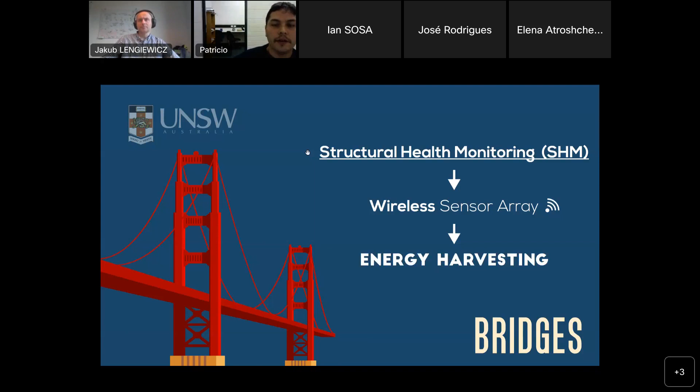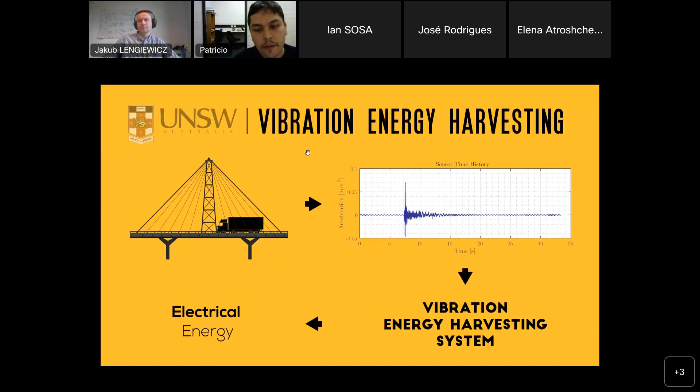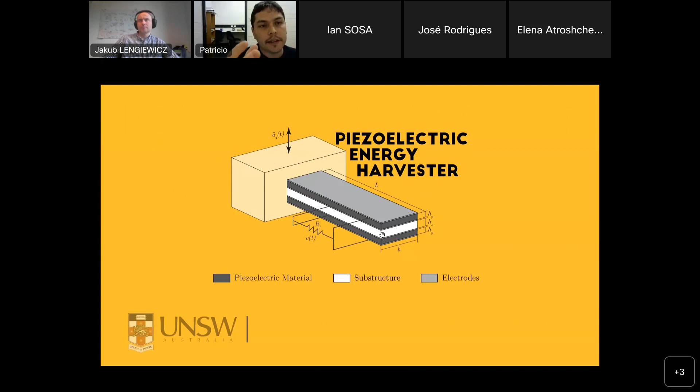In particular, vibrational energy harvesting has a big potential in this context because it can transform the traffic-induced vibrations into electrical power. There are different systems, but one of the most popular is the piezoelectric energy harvester, due to its higher efficiency per unit of area. This is its typical configuration, which consists of one or two piezoelectric layers joined to a substructure. The device is installed on the vibration source. So in this case, the idea is to install the device under the deck of the bridge. This is convenient for the installation process and also provides some protection from the weather conditions.

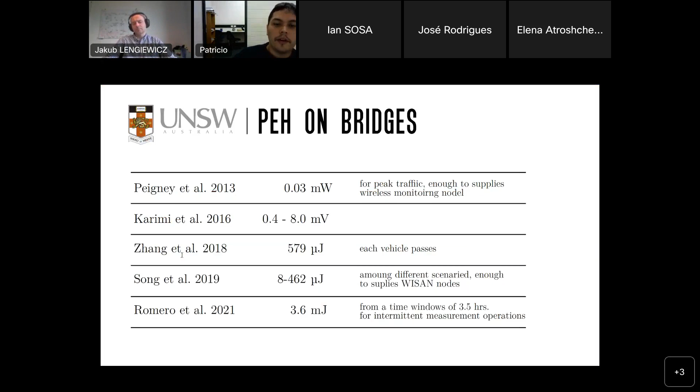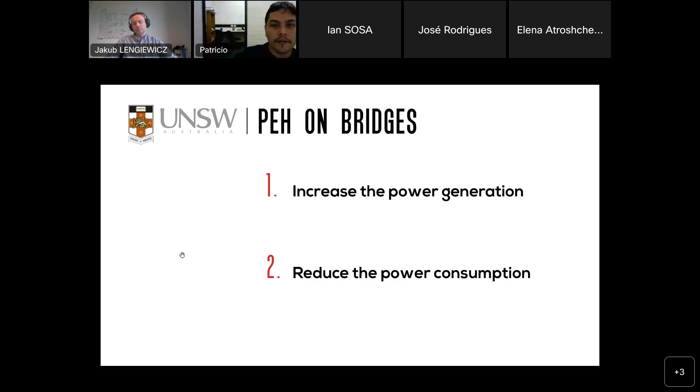There are some studies that have addressed the use of this technology on bridges. In general, the conclusion is the same: it is possible to use this device for continuous or in some cases intermittent measurement operations. However, its use has not become so popular compared with other technologies due to the order of power that they produce. We can address this problem from two points of view. We can increase the power generation of this device, or we can reduce the power consumption. Putting our focus on the second alternative, we propose to use this device as a sensor and energy harvester at the same time. This offers a new design space because they have the opportunity to be more efficient than traditional sensors, because they don't require a power supply for their operation.

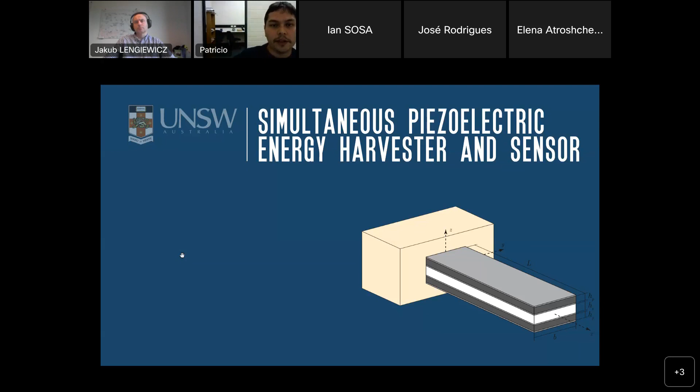In the literature, there is some research that shows it's possible to use this device as a sensor in order to determine the accelerations from some vibration source or to identify scour on bridges. However, in this study, we are interested in a different task. We are interested in traffic characterization on the bridge. Traffic characterization is an essential task in transportation systems because it provides reliable data for management and decision making in different tasks such as traffic monitoring or pavement evaluation.

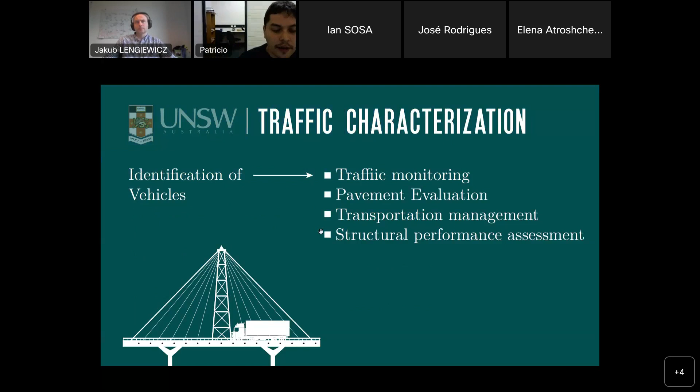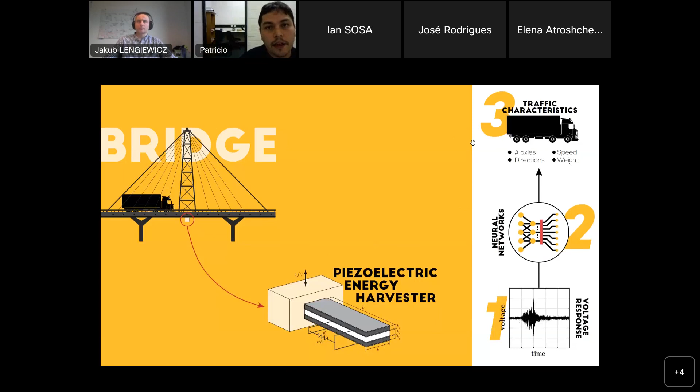There are many sensor alternatives to perform this task. However, we propose to use the voltage generated by these piezoelectric devices in order to identify the characteristics of the traffic using some deep learning techniques, okay? Deep learning has been used in this context with signals from strain and acceleration sensors in order to infer some of these characteristics. So we think that it's possible to extend some of these frameworks to our specific case.

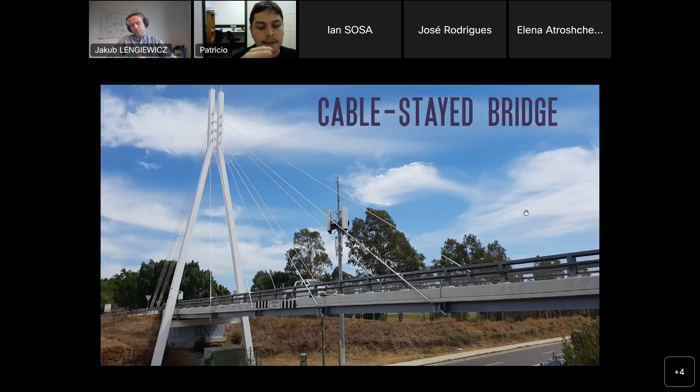Okay, in our work, we are going to focus on this particular cable-stayed bridge, which is located in the state of New South Wales in Australia. The bridge has one traffic lane and one pedestrian lane. Under the bridge, there is a set of accelerometers and strain sensors. In particular, we are going to use one device that is installed near the center of the bridge. We are also going to use two pairs of strain sensors in order to determine the speed of the vehicles that pass over the bridge.

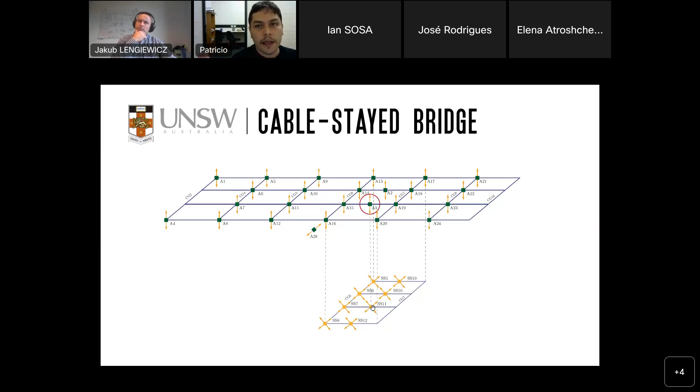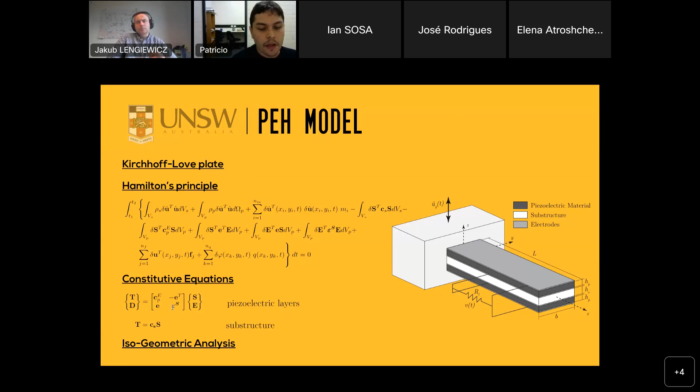On the other hand, we have one numerical model in order to estimate the voltage generated by any geometry of piezoelectric energy harvesters. This model is based on the Hamilton principle. We use these particular constitutive equations. And also we assume that the device is a Kirchhoff plate, and we use isogeometric analysis in order to solve this problem. Okay, so this is the main idea of the first part of the framework.

The idea is to use the acceleration signal from one of the sensors installed on the bridge. Later, using our numerical method, estimate the voltage generated by one piezoelectric energy harvester. Next, using one time-frequency analysis method, obtain an image like this in order to use as an input in our neural network. The method that we are using here is the continuous wavelet transform.

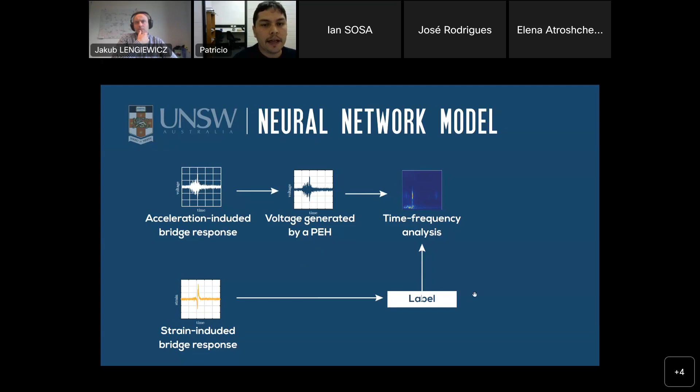On the other hand, we are going to use pairs of strain sensors in order to calculate the speed of the car that passed over the bridge, and use this information as the labels of our image. So we build a database. We divide this database and we train and test our model in order to obtain some accuracy of the speed of the car that is passing over the bridge.

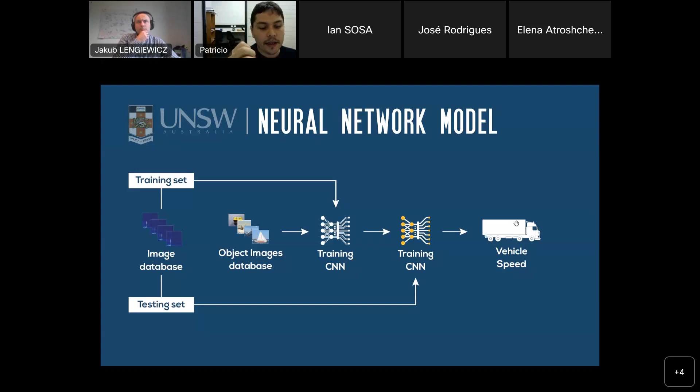Okay, so related to the selection of the convolutional neural network, it's important to note that the architecture is something that varies depending on the specific requirements of our task. So it's a good idea to evaluate different architectures before designing the final model. So in our case, we evaluate several popular architectures of neural network, such as GoogleNet, VGG, ResNet, and a couple more. And we conclude that the best one in our context was AlexNet.

So AlexNet is one of the most effective convolutional neural networks, and this is its architecture. The architecture has 8 layers. The first five are convolutional layers, and the 3 last are fully connected layers.

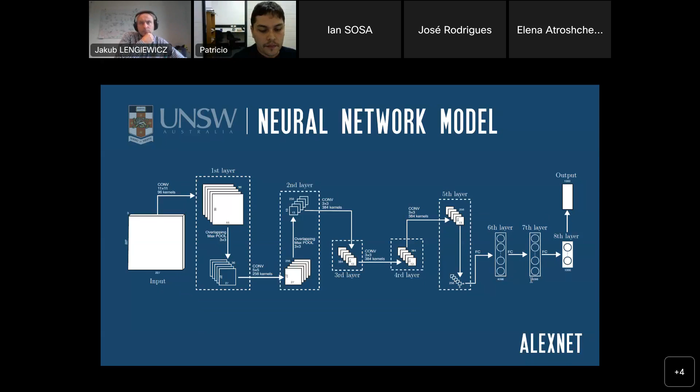In addition, in the training process, we use transfer learning because this makes this process more efficient. Here, the idea is to train the neural network using natural object images. Next, we replicate the first layers, the convolutional layers, which are responsible for extracting the information from the image. And then we just retrain the last layer using a small dataset of our digital images, or the CWT images.

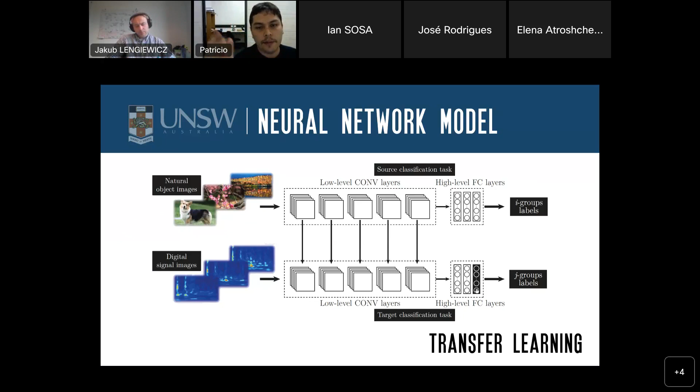Okay, so I'm going to present our case study. Here we consider more than 1,000 events. In addition, we consider 3 labels related to the speed of the car that passed over the bridge, and we train the model several times in order to obtain an average accuracy of our model. The accuracy that we obtain from one particular geometry is around 90%. But one question that arises here is, what is the impact of the geometry of the piezoelectric energy harvester on the sensing accuracy of our network?

So in order to address this issue, we consider 6 devices which only differ in the length of the devices, that is to say, in this distance. The rest of the geometrical properties are the same. The mechanical properties are also the same. And the lengths that we're considering are 5, 10, 15, 20, 25, and 30 centimeters.

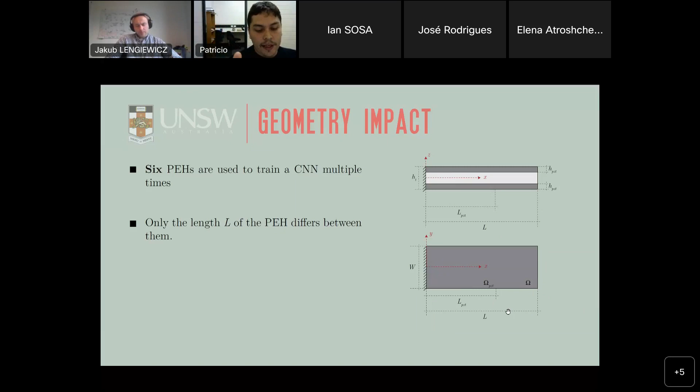So to interpret this result, it's necessary to consider that the convolutional neural network extracts information from the time-frequency analysis image. So here I present the 6 images from the 6 devices that we are studying for one particular event, that is to say, when a specific car passed over the bridge. The pink dotted line represents the resonant frequency of our device. So if we pay attention, we can see that the higher contrast in the wavelet coefficients, or in the image color of the figure, is around the resonance frequency of our device.

So that means that the information provided by each device differs between them, and some of them are better than others in terms of the predictions that we can make from them. And this leads to different sensing performance between them. Okay, so a new question that arises from here is how the sensing performance and the energy harvesting are related.

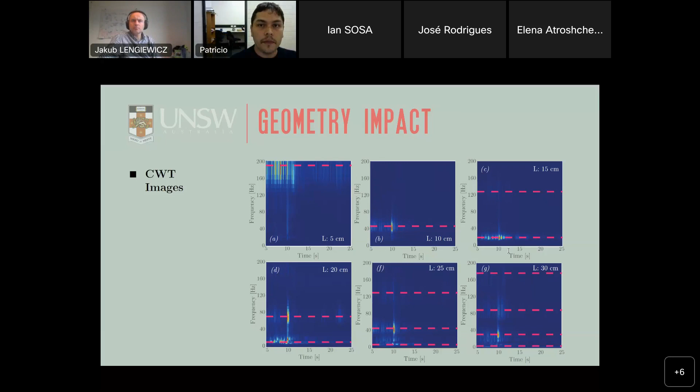So, in order to address this problem, sorry, I made a mistake in this slide, but in order to address this problem, we are going to use 5 different continuous time windows of accelerations. We are going to estimate the average energy that we can harvest from the bridge from each device, and we are going to compare the results.

So in the Y-axis, we have the accuracy of the network, and in the x-axis, we have the harvested energy from each device. So from here we can see that the optimal device in terms of sensing is the device that has a length equal to 25 centimeters. But on the other hand, the optimal device in terms of energy is the device that has a length equal to 15 centimeters. That means that there is a trade-off between the sensing accuracy and the energy harvesting of our device. So if we want to increase one of the objectives, it will be necessary to decrease the other one.

So based on this result, it's possible to state that the design of a bifunctional piezoelectric device is not a trivial task, because no single configuration simultaneously maximizes both. So in this regard, a multi-objective optimization framework is proposed to effectively tackle the selection of the geometry to address this trade-off between energy harvesting and sensing. So here we have the mathematical formulation of our problem. The idea is to maximize both at the same time, taking into consideration different geometries. In particular, we are going to use genetic algorithms to solve this problem due to their good Pareto front convergence.

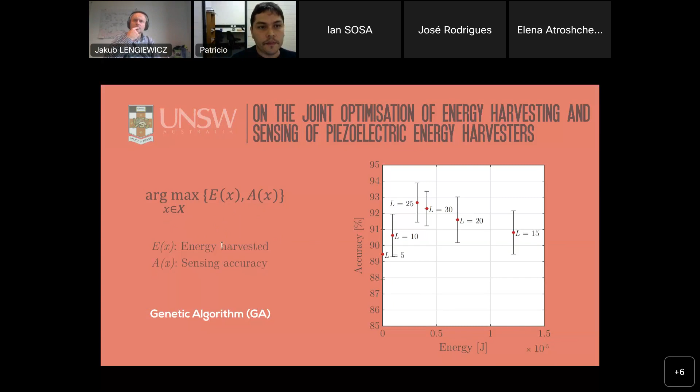One of the main challenges of this optimization problem is the long computational time to estimate the sensing accuracy and also the energy harvesting performance from one single device. So one attractive option to address this problem is surrogate modeling techniques. The surrogate model consists of an approximation of the relationship between the input and the output of a system using only a limited number of samples from a high fidelity model. In particular, we are going to use a Kriging model due to its ability to indicate the confidence level of the prediction of a new sample, and also due to its good performance with a reduced number of sample points.

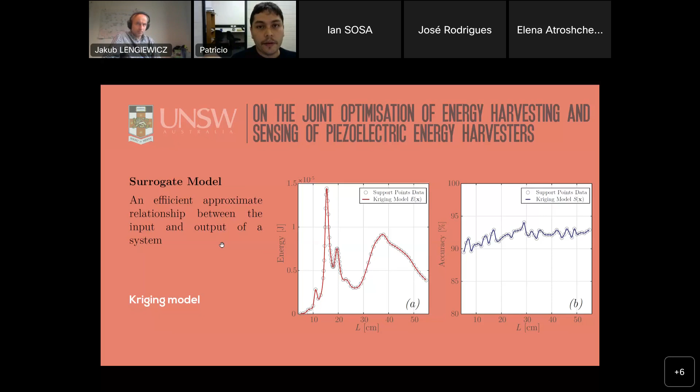Okay, so some challenges and future work. One of the things that we are working on right now is to improve the resolution of our predictions, because right now the resolution of the speed that we obtain is too big. In addition, we are interested in extending our methodology to identify the weight of the vehicle that passed over the bridge. And also we are trying to find options to reduce the variability in our predictions and to reduce the computational time of each sample. Okay.

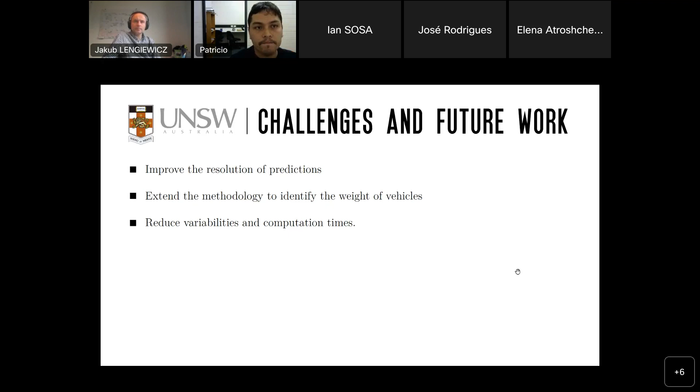Okay, thank you for your attention. This was part of my research project. Thank you so much.

Thank you, Patricio. So let's open the discussion. As usual, I have some questions, but if any of you has any question, just raise your hand or switch on your microphone and ask. So maybe I would have a question. Andreas.

Let me start. Yeah, okay. Yeah, thank you very much for your nice presentation.

Did I understand correctly that you kind of make a detour via these time frequency images in order to facilitate the whole process? So you generate out of available digital data these images, and then you go through the learning process. Is that by intention, because you would like to take advantage of some sort of filtering that you get by generating those images, or is it simply because all these learning methodologies are available for images?

Because I could imagine that you could also directly start from the digital data that you have available, because going via images raises the question how transferable the methodology is, because encoded in those images are like ranges of data, right? So is that by intention, or is that just because the learning models and these networks are set up for images and directly available?